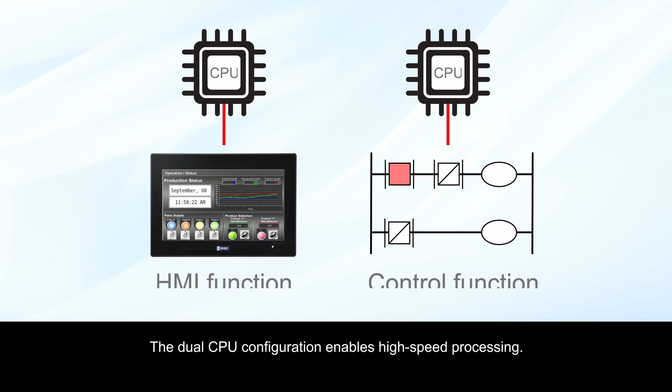The IDEC FT1J and FT2J are touchscreen displays combined with PLCs. The dual CPU configuration enables high-speed processing. FT1J has up to 22 I/O points, and FT2J has up to 30. Both units support analog I/O and pulse output.

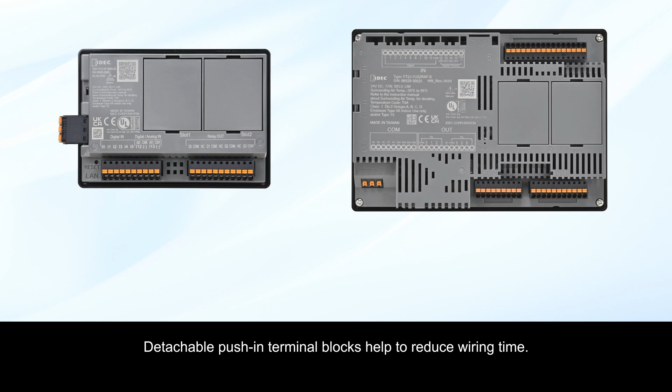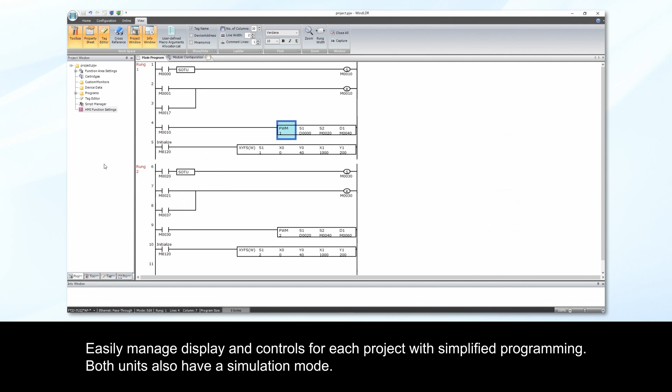Space-saving, compact design downsizes your equipment. The slim bezel design increases display space. Detachable push-in terminal blocks help reduce wiring time. Both units support a high-speed counter, PID control, and PWM control. Easily manage display and controls for each project with simplified programming. Both units also have a simulation mode.

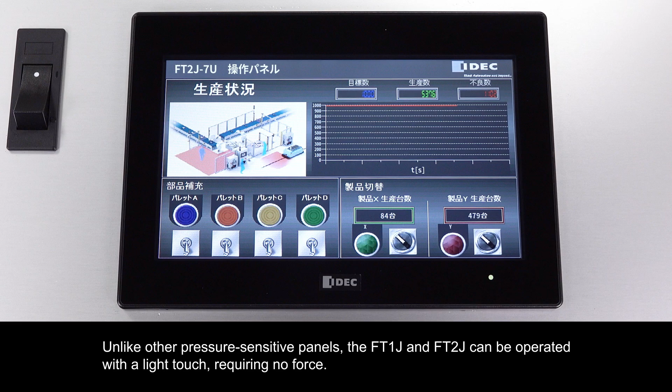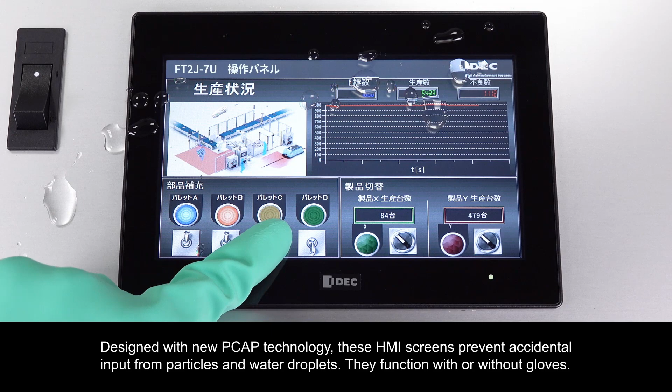The PCAP touch panel's glass top structure maintains high visibility and display clarity. Unlike other pressure-sensitive panels, the FT1J and FT2J can be operated with a light touch, requiring no force. Designed with new PCAP technology, these HMI screens prevent accidental input from particles and water droplets. They function with or without gloves. The glass top structure is made using tempered glass, making it highly durable and water-resistant.

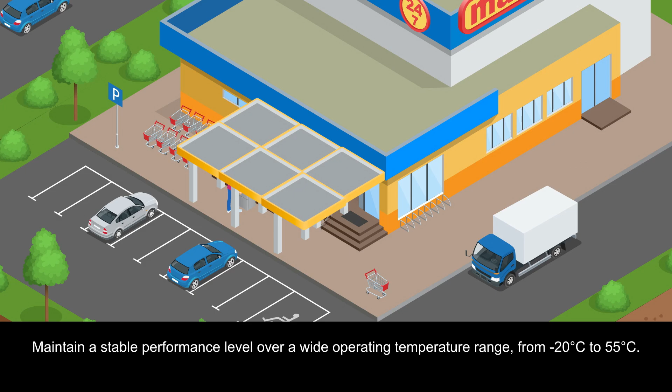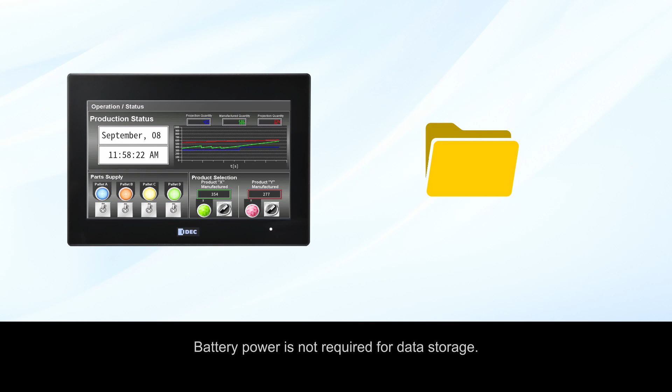Both the FT1J and FT2J are IP66F IP67F rated for cleaning with direct water jets. They maintain stable performance over a wide operating temperature range, from -20 to 55°C. Battery power is not required for data storage. No battery replacement, maintenance, or special procedures for transport by air or ocean are necessary.

Distance is no issue with the FT1J and FT2J. Remote monitoring and operation can be done from anywhere, at any time. Connect with a tablet, smartphone, or PC using the web server. A Wi-Fi USB dongle is used for wireless connectivity. You can play sound files with a connected USB speaker.

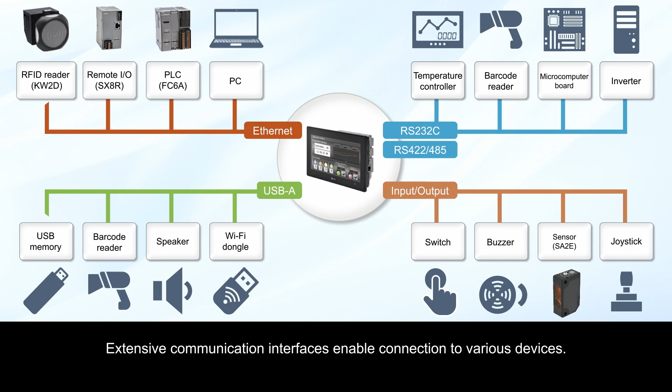Extensive communication interfaces enable connection to various devices. Seamless connectivity solutions enable IoT operation. These units support MQTT, Ethernet IP, and Modbus TCP, acting as a gateway between your manufacturing environment and the cloud.

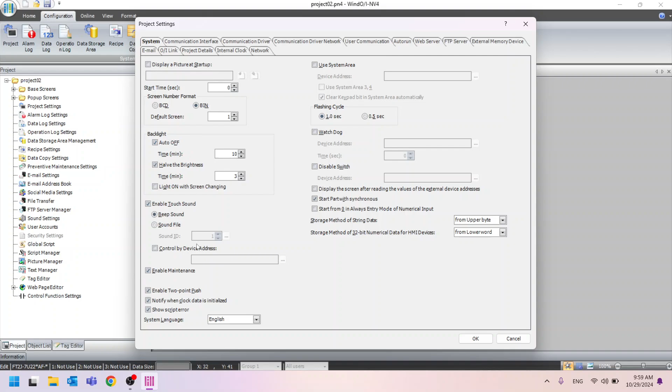Next, we have the Configuration tab. This is where you'll find almost all the settings for the various functions of the FT2J. If you click on the Project tab, a pop-up will appear. In the System tab, you can set basic settings like display a picture, startup, backlight, and beep sound. I'll provide more details about this later.

Next, in the Communication Interface tab, you can configure settings for RS-232, RS-485, and Ethernet, such as what they are used for and what protocols they use. This also includes USB settings.

In the Communication Driver tab, you can simultaneously communicate with up to 3 other PLCs by selecting the brand of PLC you want to communicate with.

The Communication Driver Network tab is for configuring the PLC to communicate with. The User Communication tab is used for writing custom communication protocols. The Web Server tab is for configuring remote control monitoring and custom web pages. The FTP Server tab is used for configuring FTP functions. The Email tab is used for configuring email notifications when the machine encounters issues.

In the Network tab, you can configure the use of BACnet IP and Ethernet IP. Here, BACnet IP setting, Ethernet IP setting, and MQTT setting are available for connecting to AWS and Azure cloud servers.

Next, there are alarm log, data log, operation log, recipe function, and many other functions that you can configure here. Next, in the Online tab, you can download or upload projects from here, and you can also monitor or simulate them.

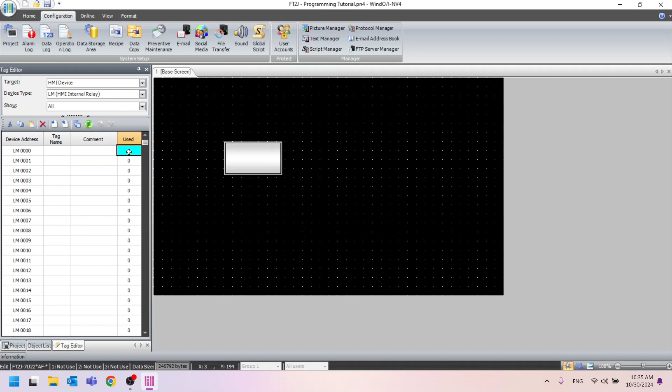The Used section shows how many times a device has been used. If you double-click on Used, it will open a cross-reference for you. This will show you exactly where your device is being used.

Next, in the Information tab, if you make a mistake in your settings or programming, an error message will appear here for you to correct.

And in these tabs, you can click on the top bar and drag them to where you want. If you're right-handed, you can drag them to the right. Personally, I prefer them on the left, and these tabs can be pinned to display all the time.

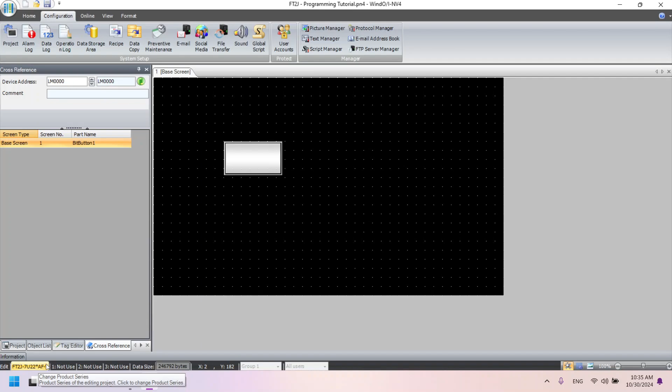At the bottom left, you'll see the model of the device you're currently using. If you click on it, a pop-up will appear. You can use this to convert your current project or older projects designed for a different model.

For example, if you want to convert your project to the FT1J model, select the desired model, choose Zooming Conversion, and click OK. The program will automatically convert your project.

Next, at the bottom right, there's a Snap to Grid option. If you uncheck it, your objects can be placed anywhere without being restricted by the grid lines. But if you check it, your objects will be forced to align with the grid lines.

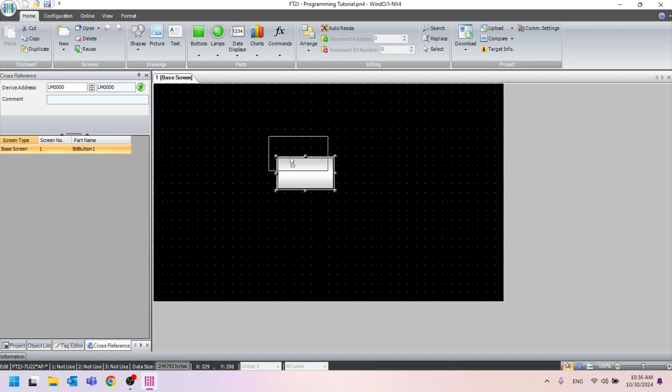And in the grid setting, you can adjust the grid line spacing to your preference. The default is set to 20, and you can also choose the grid color. Note that these settings won't be displayed when you download the program to the actual device. And you can adjust the zoom in and zoom out levels to your preference here.

In the next section, I'd like to guide you on how to use and manage screens.

To create a new screen, right-click on the base screen folder and select New Screen. The number field identifies the page number for reference, and you can name the page in the title field. Once done, click OK to create the new page. You can edit your page by right-clicking it and selecting Properties. I'll name this page Page 1, then click OK. After that, follow the same steps to create page 3 and page 4.

If you want to delete page 4, right-click on it and select Delete Screen. A pop-up window will appear asking you to confirm. Click Yes, and page 4 will be deleted. You can open your screen by double-clicking on it.

Next, right-click on the base screen folder and select Duplicate Screens. A pop-up window will appear where you can choose the screen you want to duplicate and set the screen number and number of copies. For example, I'll set it to 10 and 3, respectively. Then click OK. You will have 3 new pages added: page 10, page 11, and page 12.

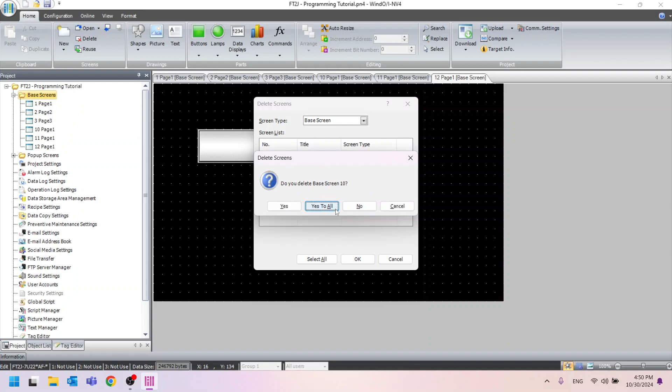Next, if you want to delete multiple pages at once, right-click on the base screen folder and select Delete Screens. You can click on the first page you want to delete, hold down the Shift key, and click on the last page you want to delete. All pages between the first and last selected pages will also be selected. Then click the OK button. A pop-up window will appear, and you should click Yes to All to delete all the selected pages.

Next, right-click and select Reuse Screens. This function allows you to bring screens from other projects into your current project. Find and open the other project file. An open screen pop-up will appear. In this example, I'll copy page 10 and page 11, then click OK. You'll see the screens added to your folder. For this tutorial, delete them afterwards. You can close the screen you're not using by clicking the X in the top right corner.

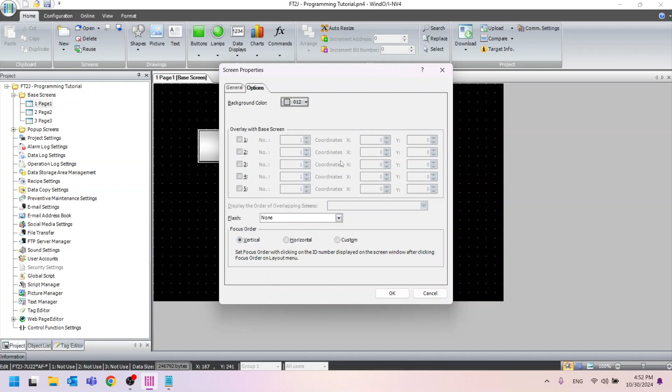Next, I'll guide you on how to set the properties for each screen. You can right-click on the screen and select Properties, or click on the Design area. In the General tab, you can set the number and title. In the Options tab, you can change the background color to your desired color. Then click OK, and the background area of that page will change to the color you've set. For this tutorial, I'll keep the default black color.

And you can create an overlay screen. An overlay screen functions similarly to a template screen, which I'll demonstrate for you next. Please click OK to close this pop-up.

Next, I'll guide you on how to create a pop-up screen. There are already some default pop-up screens available, such as the numerical keypad. You can create one by right-clicking on a folder and selecting New Screen. In the Settings pop-up, you can define the page number and give it a name. I'll call it Pop-up 1. You can also customize the size by adjusting the width and height. For example, I'll set the width to 400 and the height to 200.

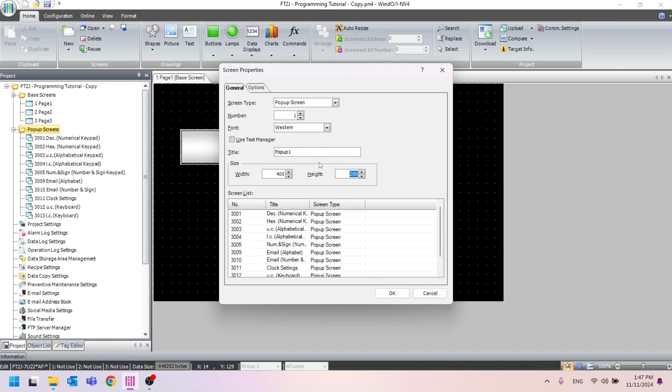In the Options tab, you can also adjust the color and effects, but I won't be making any changes there. After that, click the OK button, and a pop-up screen will appear, which you can design according to your preferences. When you want to use it, you can use the Go to Screen button and select the pop-up to open it.

Next, I'd like to introduce you to a method for creating an overlay template screen. The advantage of this is that you won't have to design and edit your objects on every page. By using this method, you can design and edit objects within a single page, and the changes will be applied to every page where you use this template. This can significantly reduce your design time.

Right-click on the base screen folder, then select New Screen. For this example, set the number to 100 and the title to Template 1. Then click the OK button. On page 100, I'll create an example template for you using various objects so you can see how to make an overlay screen. I'll provide more details about these objects later.

Go to the Home tab and select Picture. Then draw on the Design area. A Picture Manager pop-up will appear. Click Import and select the background image you designed.

Click Open and Yes to all. Next, uncheck the box for your image to keep it stored on your device. If you check it, the image will be stored on an external memory like a flash drive. Then, click the Select button to insert the image into your design.

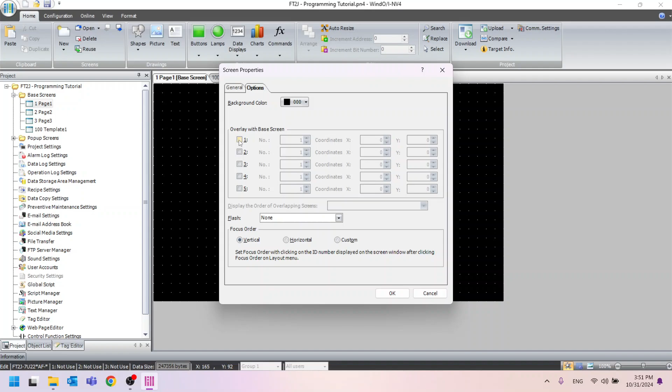Next, go back to Page 1 that we created. Delete the buttons we made earlier. Then, right-click on the page and select Properties. Go to the Options tab. Check the first option and select Overlay Screen at 100. For the coordinates, set both X and Y to 0.

At Display the order of overlapping screens, select Display this screen over Overlay 1. Then, click OK. You will then have the template you designed on page 100 overlaid on top of your page 1. Then, on page 1, you can design anything you want. Next, go to page 2. Delete that button. Then, go to the settings and configure it the same way as page 1. Do the same thing for page 3.

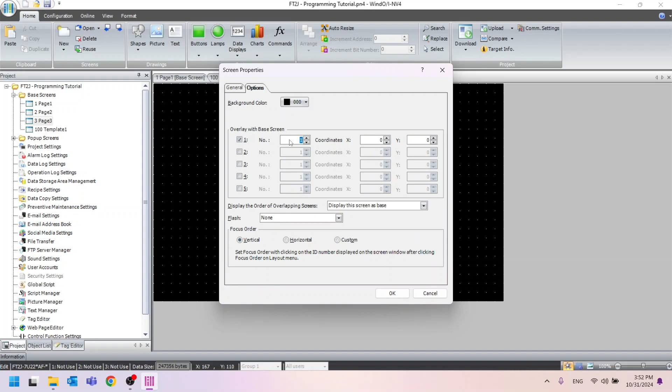If you want to edit your template, go to page 100. For example, if you want to add a picture to your template, go to Picture and select the image you want. Then, adjust the size. You'll notice that if you add a picture to page 100 just once, the same picture will appear on pages 1, 2, and 3. And you can design the other parts of each page as you wish, independently. However, only the objects drawn on page 100 can be shared among all pages.

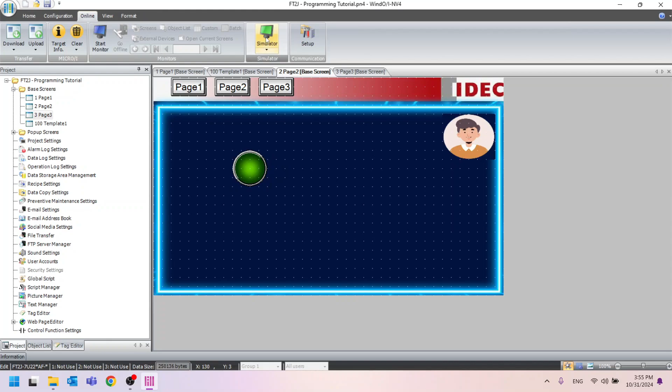This is a common use case for overlay screens, to save you time on design revisions. You can also try out the simulation by going to the Online tab, then selecting Simulator and clicking the OK button to save your project. A simulator pop-up will then appear. You can try clicking the buttons to switch your screen to each page you design.

Then, close the pop-up. In the next part, I'd like to introduce you to the drawing tools.

Let's start with shapes. Shapes provide you with basic geometric forms that you can use as needed. For example, let's take a rectangle, draw it wherever you want on the canvas, and you'll get a rectangular box. Next, you can double-click to open a settings pop-up. This will allow you to adjust the line width, line type, foreground color, background color, pattern, round type, and shadow according to your preferences. Once you've finished setting your preferences, click the OK button. You will also get a rectangle according to what you have set.

Next, I'll introduce you to the Picture tool. Click on Picture and then click on an empty area. A Picture Manager pop-up will appear. First, I'd like to show you how to create a new folder.

Click on the Configure button. A category pop-up will appear. Then, click on the Add New Category button. This will create a new folder. You can also delete it by clicking the Delete button. Click the Add button to create a new folder, and then click the Rename button to change the folder's name. After that, click OK. This will allow you to categorize your images.

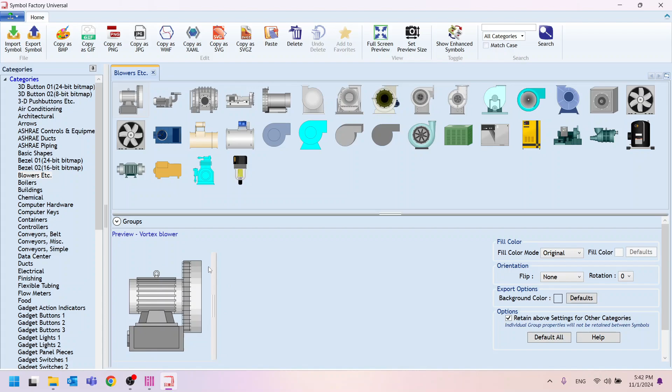If you want to import an image, simply double-click on the image area. You can then name your image in the Picture Name field. There's also a color exchange checkbox, which I'll explain later. After that, click OK, then select the desired image and click Select.

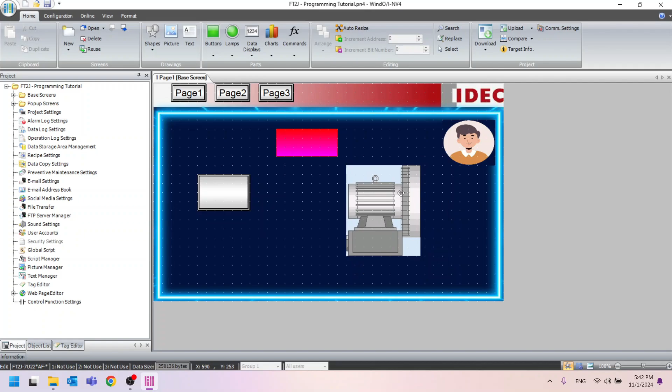You'll notice that the image you added has a blue background, which we don't want. To fix this, double-click on your image, then press the Browse button. A Picture Manager pop-up will appear.

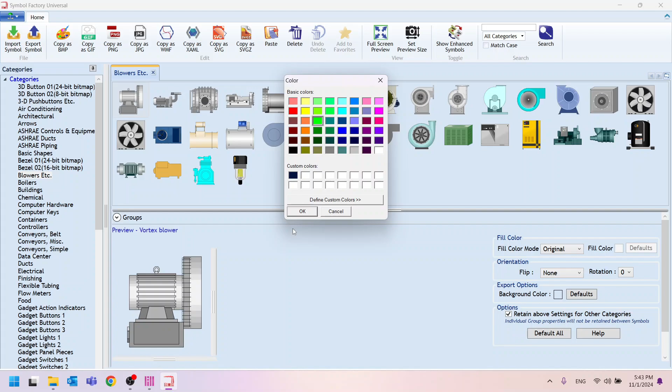Go to the Symbol Factory. In the export options for the selected image, choose a background color. I suggest choosing a color that doesn't appear in your image. For example, let's choose green.

Then click OK, and the background of your image will be changed to green. Next, double-click your image and give it a name. Then check the color exchange box. In the From field, choose green, the same color you selected earlier. Click OK. In the To field, select transparent color and click OK again.

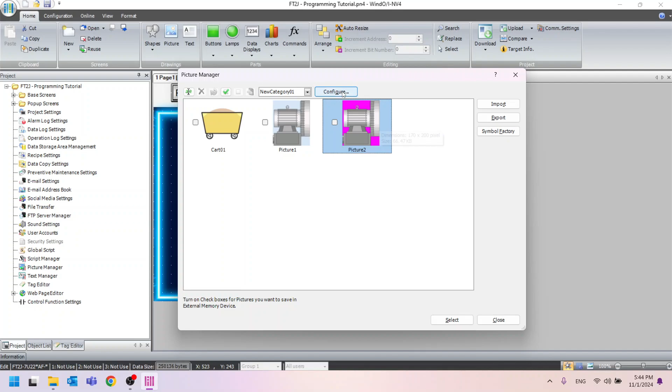Now you'll have your image with the background removed, which will be displayed as pink in the software. Next, click Select and then OK. Now your image will have its background removed and you can resize it as needed. This is a typical workflow when using the Picture command.

Next, for the Text tool, click on Text and then click on the area where you want to place your text. A property pop-up will appear. Try typing the text you want and then click OK. You will now have the text you created.

If you want to edit, double-click on the Font section. You'll find a list of system fonts available. If you use a system font, you can adjust the size here as needed. And you can also adjust the text color.

You can choose any color you want. And you can adjust the background color. Then click the OK button. Next, double-click to open the pop-up.

You can select Windows Font. At the Windows Font option, you can click Change, and then select the desired Windows font. After that, click OK, and the selected Windows font will be applied to your text. This is generally how you use the Text command. In the next part, I'd like to guide you on how to use the Buttons command.

Please click on the Buttons command, then select the Bit Button command, and draw it in your desired area. You'll then have a Bit Button object. Next, double-click to open the Settings pop-up. First, let's look at the General tab.

The first thing I want to introduce is the Action mode. When you click once, it will display various actions such as Set, Reset, Momentary, Alternate, Toggle, and Move. I'll explain how each of these works for you.

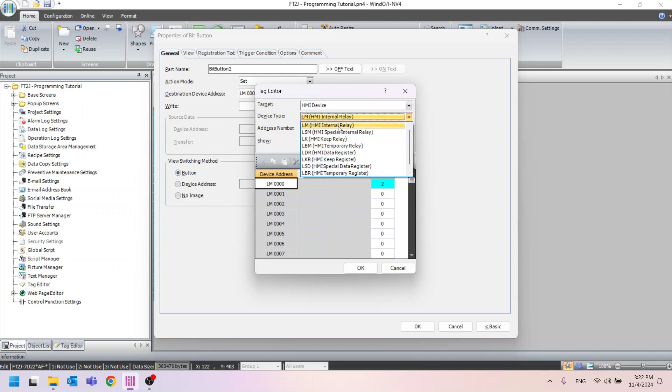A pop-up window will appear. At the target, if you select an HMI device, the HMI device is an internal device located on the touchscreen side. Please click on Device Type. The most commonly used device is HMI Internal Relay, which functions as a bit device, displaying either a 0 or 1 status. Next, LDR HMI Data Register is used for data types that are word.

If you want to use a specific device, you can simply click to select it from the list, or you can directly input its address number. For this tutorial, I will only introduce these 2 device types. I will not introduce the other types to you yet.

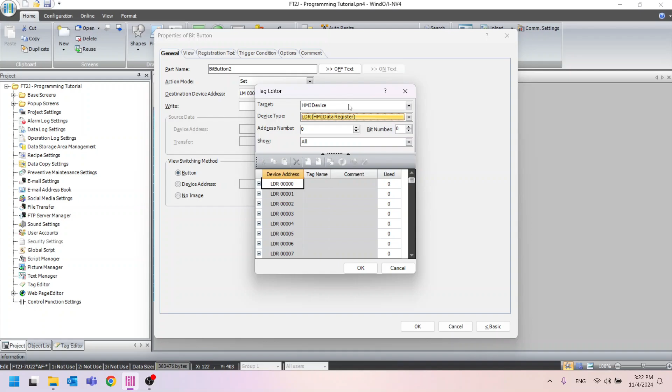Next, go to the target and select Control Device. You can only select FT1J or FT2J models, which are HMIs with built-in PLCs. In the device type, you will find PLC side devices such as Q output, M internal relay, timer, counter, and data register. You can start learning to use these PLC side devices immediately.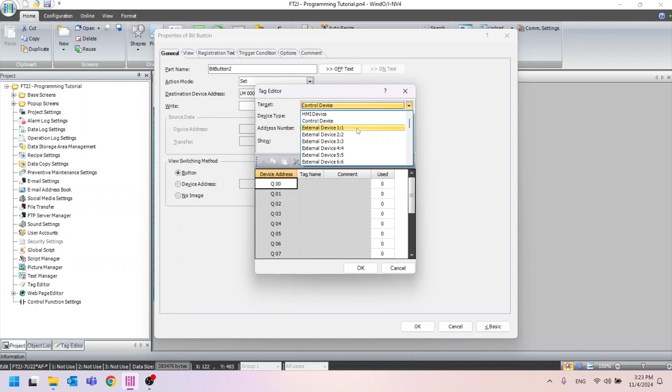Next, for external devices, if we have additional connections set up with other PLCs, you can then call up and use devices from those PLCs as needed. For this tutorial, please select the target as the HMI device, set the data type to LM, and the address to 0, then press the OK button.

In the right section, if your program doesn't display this part, you can click the Basic or Advanced button here. I recommend selecting Advanced to access all settings. You can only configure this section when you select the Set or Reset action.

For example, when you choose Set as the action, LM0 as the destination device, and write a value of 5, pressing the button, LM0 to LM4 will set the value to 1.

Next, for the action mode, if you choose Move, you can also specify the source data and transfer. For example, if you set the source device to LM0, the destination device to MO, and the transfer value to 4, when you press the button, the values from LM0 to LM3 will be moved to MO to M3.

For this tutorial, I'll choose LM5 as the source device and move just one value to the destination device, LM0.

Next, regarding the view switching method, the default setting is usually button. This means that your images, when they are on or off state, will appear as if a button has been pressed. You can select a device address to make your button change its state based on the specified device. This will function like an illuminated push button switch.

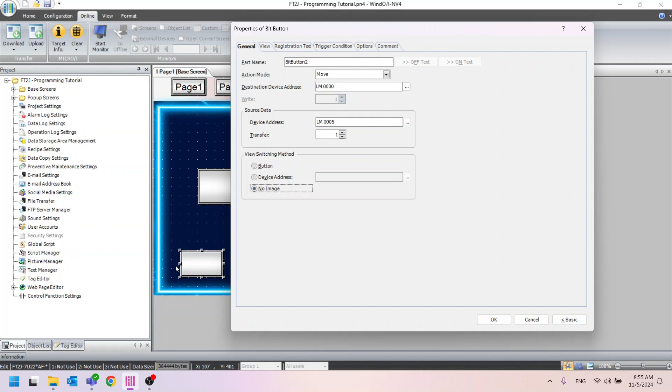For example, if you set it to LM10, when your LM10 is in the on state, your button will display the on state image, and if your LM10 is in the off state, your button will display the off state image. And if you select no image, the image for your button will not be displayed, which is similar to hiding the button. However, the button will still function normally.

Please select the button first. Subsequently, within the View tab, you can select images for your button in different states. You can specify which image you want to display when the button is on and which image you want to display when it is off.

In the Image Type section, if you select Standard and then click the Browse button, a pop-up window will appear. You can select various images as desired, and you can search for other images by changing the type. For now, I'll use the rectangle type.

You can press the off or on button to view your image in each state. I will select this image, and then please press the OK button.

On the right-hand side, you can adjust the color of your button. For the foreground color, I will select blue. And for the on state, I will also adjust it to blue. You can press the on or off button to view a preview of your button.

Next, if you select the image type as picture, please click the Browse button. A Picture Manager pop-up will appear. You will be able to select the imported image that you desire.

Please click on the symbol Factory button. A pop-up will appear. If you wish to use a button or a lamp, I recommend using the Round 01 or Square 01 categories. As an example, I will choose this button.

This will allow you to zoom in on your image. I recommend clicking the default All button once to see the original picture. If you select this image, please double-click on it.

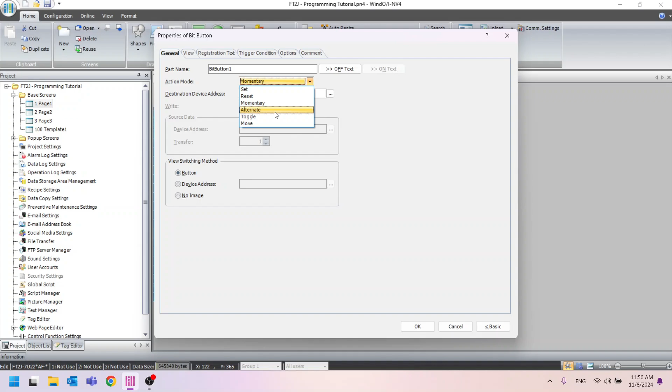Next, I'll make another copy of the button, change the action to Alternate, and the text to Alternate. Then click OK. Next, repeat the same process, but change the action to Toggle.

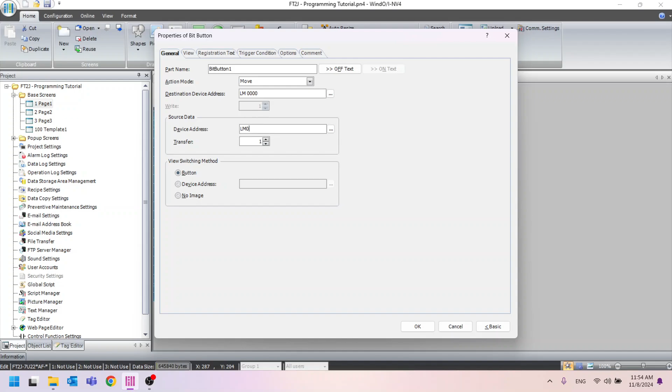Next, I'll make another copy of the button, and change the action mode to Move. I'll set the source device address to LM0, and the destination device address to LM1. Then change the text field to Move. Finally, click OK. Next, I'll create a sample lamp so you can see the status of the device address I've set.

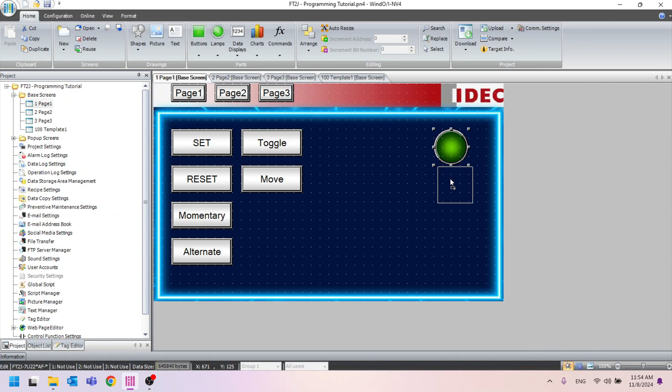I'll explain the lamp section in detail later. In the trigger condition section for lighting, the default device address is already set to LM0. Press the close button. Next, I'll duplicate the lamp and set its device address to LM1. Then click OK. Next, I'll go to the Online tab and select Simulator.

The software will prompt you to save your project first. Please click OK. A simulator pop-up will then appear. Next, try pressing the Set button.

Your device address, LM0, will remain in an on state. If you press the Reset button, LM0 will remain in an off state. For the Momentary button, if you press it, LM0 will turn on, but if you release it, LM0 will turn off.

The Alternate button acts like a toggle switch that stays in its current state until you press it again. So if you press the Alternate button, it will be as if the button is constantly pressed, and LM0 will remain on. Pressing it again will turn LM0 off.

The Toggle button, on the other hand, simply switches LM0 between on and off each time you press it, without any visual indication that the button is being held down.

If I press the Move button, the value from LM0 will be moved to LM1. If I press the Set button, LM0 will be turned on. Then if I press the Move button, the status of LM0 will be copied to LM1, causing the lamp to also be on. In general, the Bit button is commonly used in this way.

After that, please close the simulator. Next,

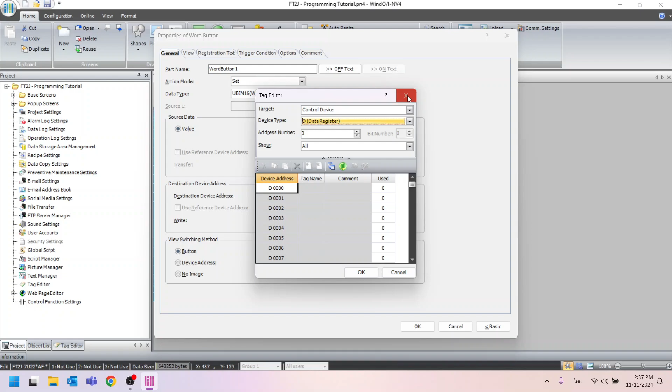For this time, I'll use LDR0. For example, I'll set the source device to 100, which means when I press this button, the value 100 will be set to my LDR0.

Next, set the action mode to Move. This will allow you to specify a source data. I'll copy this device address and change it to LDR10. This means when I press the button, the value in LDR10 will be moved to LDR0. The Move action is commonly used in this way.

Next, set the action mode to Momentary. The momentary action has two values.

Let's say set the on data to 100 and the off data to 0. This means when I press the button, the value in LDR0 will be set to 100, and when I release the button, it will return to 0.

Next, set the action mode to alternate. If I set the on data to 100, pressing the button once will change the value in LDR0 to 100. Pressing it again will change it back to 0, alternating between the on and off data values.

Frequently used actions include add, subtract, multiply, and divide. Let's say you choose the add action. You can define a source one. For example, I'll copy and change it to LDR10, and for the value, I'll set it to 100. If I press the button, the value from LDR10 will be added to 100, and the result will be stored in LDR0.

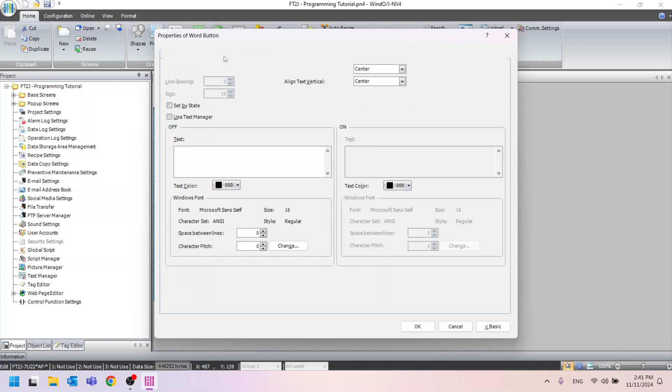Once you've finished setting everything, click the OK button. Next, go to the Go to Screen button. Click it, and then draw on the area you want. Double-click to open a settings pop-up.

There will be various actions available for you to choose from in the action mode. Choose Switch to Base Screen. This will allow you to set which screen to switch to when the button is pressed. For example, if you want to switch to screen 2, when you press this button, set the screen number to 2. When you press the HMI button, it will switch to screen 2.

And what I frequently use is the Open Pop-up Screen function. When you press a button, a pop-up screen will appear. For example, if you set it to screen number 1, pressing the button will display pop-up screen 1 on your HMI. You can also set the X and Y coordinates to specify the exact location where you want the pop-up screen to appear.

Another function I frequently use is Back to Previous Screen. This means that when you press this button, the HMI will go back to the previous screen you were on. For example, if you're on page 1 and you switch to page 10, pressing this button will take you back to page 1. The settings in the other tabs will be similar to the previous button I explained.

Once you've finished setting everything up, click the OK button. Next, I'd like to introduce you to the Multi button. Click and draw on the area you want. Then double-click to open the settings pop-up. The Multi button works similarly to the buttons we've discussed earlier, but with the added ability to create multiple functions.

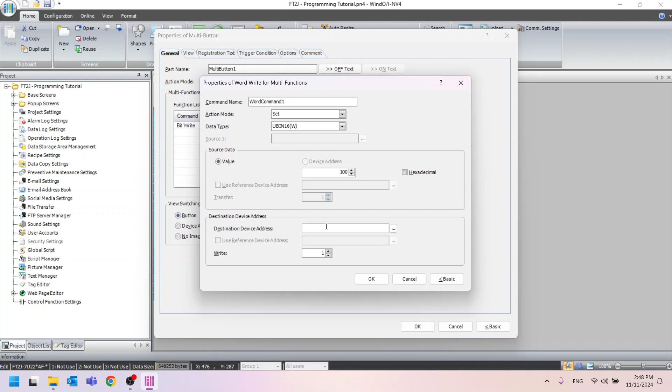Then click Add. Let's say I choose action mode as set and value as 100 and destination device as LDR0. Then, click OK, add another Go to Screen action, then click Add and select screen number as 2. Finally, press OK. If you press this button once, all three commands will be executed in sequence.

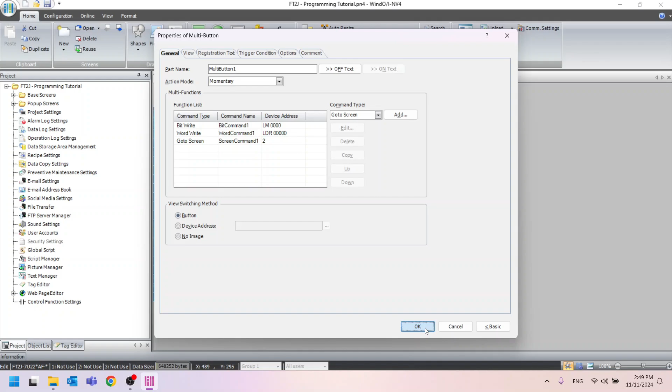You can customize the settings in the other tabs to your liking, just like the buttons we've discussed earlier. Once you're finished, click the OK button. In the next section, I will provide examples of how to use the buttons that I have previously explained.

Before we begin, I will delete the buttons that I have already created. The first button I would like to introduce is the Go to Screen button. I have already created these buttons, labeled Page 1, Page 2, and Page 3, at this location. I've already created this button on page 100. If you navigate to that page, you can modify the button settings by double-clicking on it.

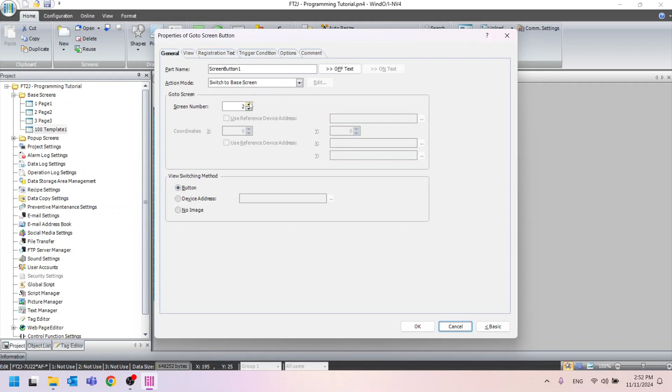In action mode, I will select Switch to Base Screen, and choose 1 for the screen number. Then, I will press the OK button. For the Page 2 button, the settings will be similar. However, you'll select 2 for the screen number and then press OK. The Go to Screen button will be used in a manner similar to this example.

Next, we'll return to page 1, and I'll demonstrate an example of a Word button for you.

I will draw the button as desired, then double-click on it to open the settings. In this action mode example, choose Add. For source 1, I'll use LDR0. For source 2, I'll set the value to 10.

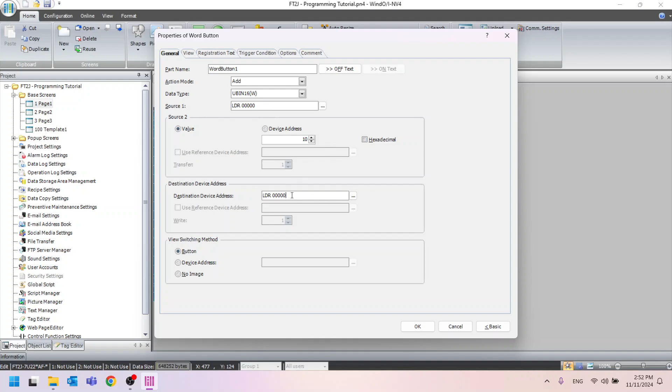For the destination device address, I'll specify LDR0 as well. This means I'll take the value in LDR0, add 10 to it, and then store the result back in LDR0. For the View tab, I'll use the default settings for now. On the Text tab, I'll name this button Add. For the Trigger Condition tab, I won't make any additional changes. Then I'll press OK, and so I will now have an Add button.

Next, I'll go to the Data Display section and select Numerical Display. I'll demonstrate how to use it first, then provide a more detailed explanation later. I will draw here, then double-click to open the settings pop-up. In the display device address, I will set it to LDR0, then press OK.

Next, I will demonstrate a simulation. I'll go to the Online menu, select the simulator. The software will force you to save, then press OK. Once the simulator window appears, clicking the Add button will increment the value of LDR0 by 10. Each subsequent click will increment the value by another 10. This is an example of using a Word button to manipulate a Word-type device address.

After you've finished experimenting, please click the Close button. This is a basic example of how to use a button. In the next part, I'd like to introduce you to how to use a lamp.

Please click on Lamp, then select Pilot Lamp. Then draw in the area you want. For the pilot lamp, it will function the same way we used it before. It will be used to indicate the status of our device address, whether it's on or off. Please double-click to open the settings window.

In the General tab, go to Action Mode. By default, it's set to No Flash, which means when your lamp is turned on, it won't blink. If you want your lamp to blink while it's on, select Flash, then set the flash trigger device address. This means that when your trigger device is turned on, your lamp will blink. But for this example, I'll choose No Flash first.

Next, on the View tab, the settings will be similar to the button you've tried before. If you choose Standard, you can click Browse and select the image you want. But for now, I'll use the default. Then click the Close button. You can press the On or Off button to see the status. And you can set the foreground and background colors for both the off state and on state here. But for this example, use the default value first.

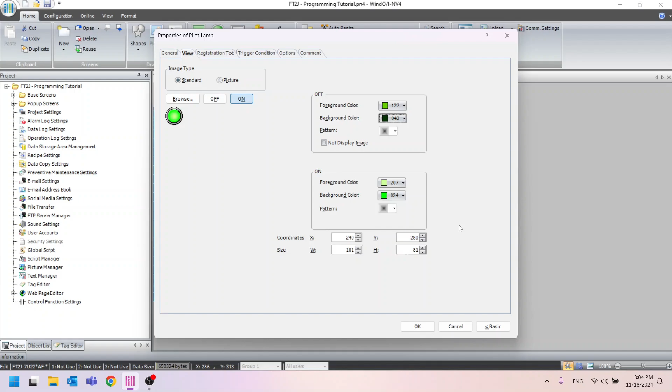Next, on the Text tab, you can choose the font you want, such as Windows or Western. I'll choose Western, and you can set the size here and define your text here. Or if you're using a Windows font, you can click the Change button to customize your font as desired. But for this example, I'll use the Western font and leave all the settings as default.

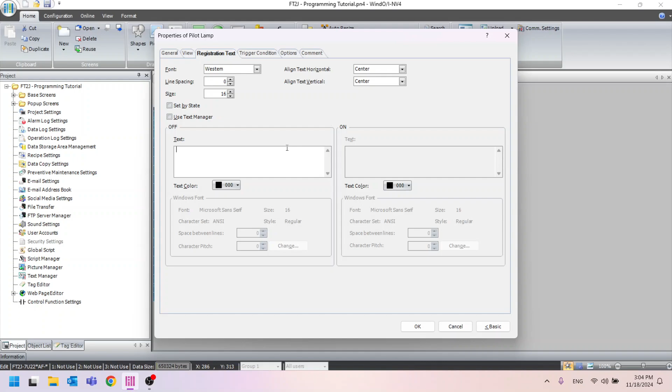Next, on the Trigger Condition tab, in the Lighting section, you can define the conditions that will cause your lamp to turn on or off. In the Trigger Type section, you can set conditions like while on or while off. Typically, we use while on. In the Device Address, you can specify the device address whose status you want to display, or click the three-dot button here and select the desired device address. For now, I'm going to select LM0. In the Visible condition, it's set to Always Visible by default.

If you want to hide your button based on certain conditions, you can set it up in this section. For now, I won't be configuring this part. Next, on the Option tab, you can check the box for Place on the top layer, so that your lamp will be displayed on the top layer. Finally, in the Comment tab, you can add a comment if you'd like. Once you've finished setting everything up, click the OK button.

Next, please try the simulator. Go to the Online menu and select Simulator. Then click the OK button to save your project. The simulator window will appear. This means your lamp is assigned the device address LM0.

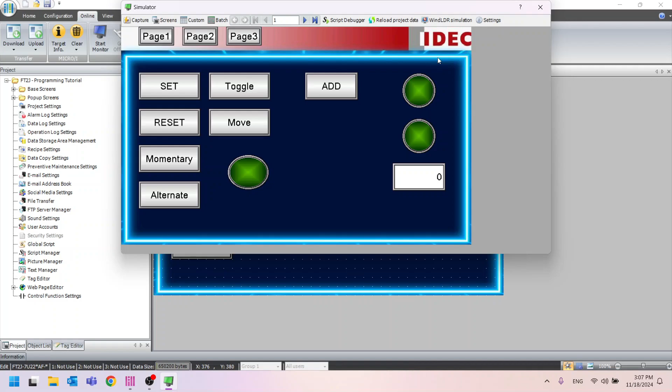So when you press the SET button, your lamp will display an on status. And when you press the Reset button, your lamp will display an off status. This is the same behavior as the button we created earlier. Then please close the simulator. Next, double-click to open the settings window. Then select Flash and set the flash trigger device address to LM0. Finally, click OK. Then try the simulator again.

Press the SET button. You'll notice your lamp will blink even though the device address LM0 is always on. This is a common way to use a lamp. Once you're finished testing, close the simulator.

In the next part, I'd like to show you how to use a multi-state lamp. Go to the lamp and then select multi-state lamp. Then, draw in the area you want. A multi-state lamp works similarly to a pilot lamp, but you can have multiple states.

The device address used to control it will be a word-type device. Please double-click to open the settings window. The switching method is normally set to value, but you can choose either bit number or value as you prefer.

If you choose bit number, your lamp will change its state according to the bit you turn on. For example, if you turn on bit 0 of your device address, the multi-state lamp will display the image for state 0. If you turn on bit 1, it will display the image for state 1. If you turn on bit 2, it will display the image for state 2. And if you turn on any other bits that are not configured, it will display the image for state off.

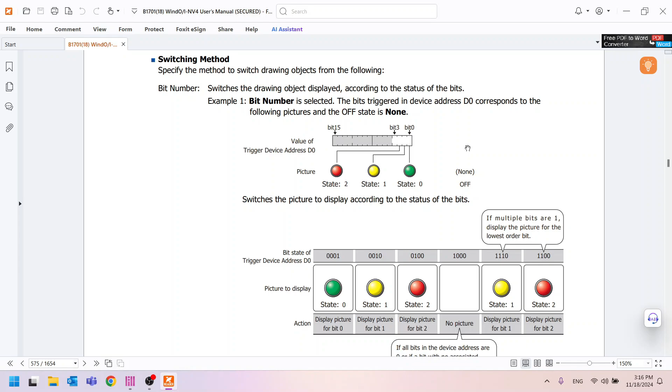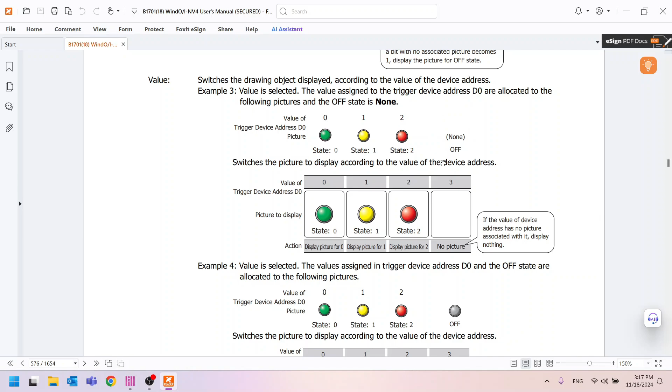Next, if you set it to value, the state of your image will change according to the value of your device address. For example, if you set your device address to D0, and the value of D0 is 0, your lamp will display state 0. If the value of D0 is 1, your lamp will display state 1. If the value of D0 is 2, your lamp will display state 2. If the value in D0 is not within the configured range, it will display state off. This is roughly how it works.

Next, go back to the software. In this example, I will use the value method. For the trigger device address, please click the 3-dot button and select device address as LDR1. Then, click OK. Next, go to the View tab.

Under Image Type, you can choose between Standard and Picture. However, for this example, I'll select Standard first. Next, go to the Text tab. You can adjust the font of your text here. Next, go to the State tab.

Here, you can set the number of states. By default, it's set to 4 states, which are state off, 0, 1, 2, and 3. There will be corresponding images displayed below. If you want to add more states, you can press the up arrow button. For example, if you want 6 states, states 4 and 5 will be added. You can also decrease the number of states by pressing the down arrow button. However, in this example, I will use four states.

In the settings, if you select state off, you can input your text here and customize the color as you wish. You can see a preview image here. You can also set the pattern and text color. For state 0, the lamp will be set to green by default. You can customize the color if you'd like. Other states will follow the same pattern. However, for this example, use the default settings.

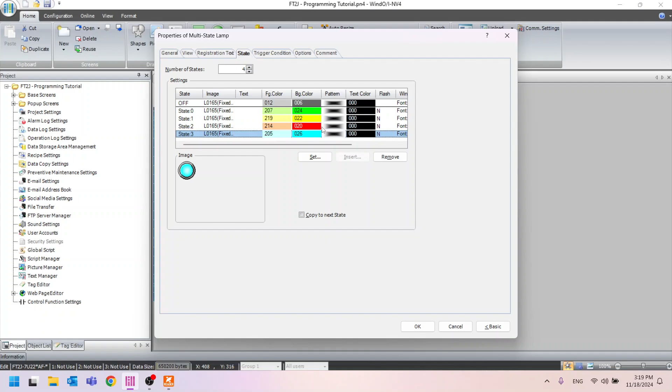Next, we'll go to the Trigger Condition tab. Here, you can set the visible condition. For now, use the default setting. You don't need to make any changes in the Option or Comment tabs. Once you're finished setting up, simply click the OK button.

Next, go to Data Display, then select Numerical Input and draw it in your desired area. I'll explain this object in detail later. Next, double-click to open the settings window. In the Destination Device Address field, select LDR1 and then click OK. Once you've finished setting everything up.

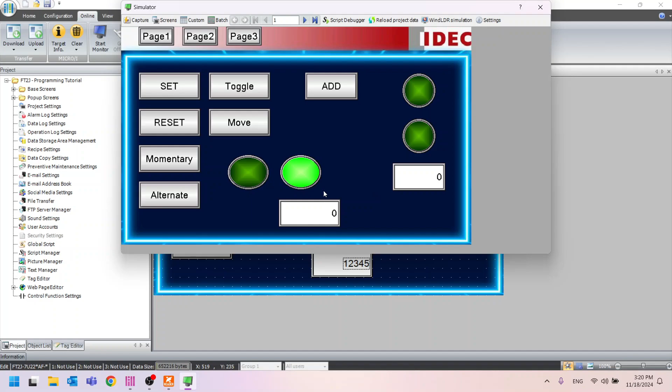Let's test your program using the simulator. Go to the online menu and choose Simulator. Then, click OK to save your project. Right now, my LDR1 is set to 0, so my lamp will display the image for state 0.

If I change the value of LDR1 to 1, the image will switch to state 1. Similarly, if I set LDR1 to 2, the image will change to state 2, and so on for state 3. If the value is 4, the image will display as state off, because you haven't defined a specific setting for it. This also applies to any other values that you haven't configured in your multi-state lamp. So, that's how you use a multi-state lamp. Once you've finished testing, you can close the simulator window.

Next, I'd like to introduce you to the numerical display. Please navigate to Data Displays, select Numerical Display, and draw it in your desired location. After that, double-click to open the settings window. The numerical display will be used to show the value of your device address, allowing you to see its current value.

In the General tab, you'll find a section called Display Type. Here, you can choose between decimal (base 10) and hexadecimal (base 16). Typically, we use decimal. Next, let's move on to the data format.

Under Data Type, you'll find various data types to choose from, and in the Digit section, you can specify the number of digits to display. If you refer to the manual, and select decimal for the display type, you'll have the option to choose W or I for the word type, allowing up to 5 digits. If you select D or L for the double word type, you'll be able to display up to 10 digits. You can also set it to BCD or float.

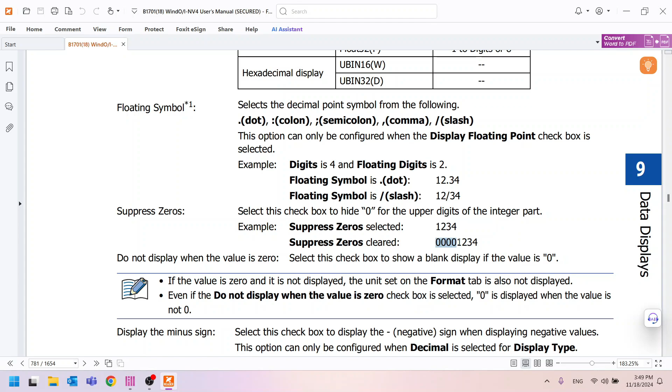Next, for the Do Not Display When Value is 0 option, if you check it, it means that when the value in your device address is 0, nothing will be displayed. However, I generally recommend that you leave this option unchecked.

Next, for the Display the minus sign and Display the plus sign options, if your data type can display negative values, like the I type, you can choose whether or not to show a minus sign or a plus sign before your numbers. For the symbol to show when out of range or error occurs option, you can customize the symbol that will be displayed when the value is out of the acceptable range or when an error happens.

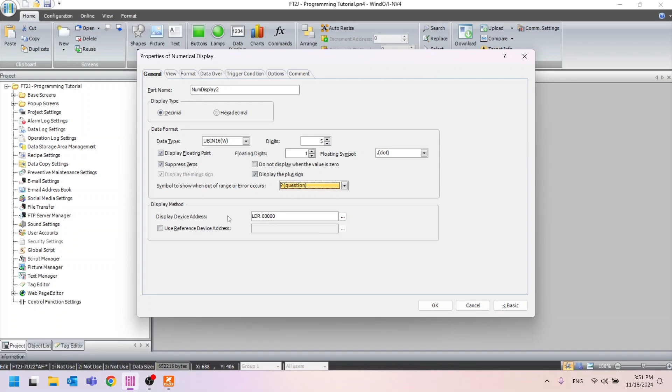In the Display Method section, the Display Device Address option allows you to specify which device address you want to show. You can tap the 3-dot button, then select the desired address. In this case, I'll choose LDR0. After that, please tap the OK button.

Moving on to the View tab, in the Image Type section, you can choose between Standard, Picture, and None. If you select Standard and click Browse, you'll be presented with a list of standard images to choose from. If you select the Picture option and click Browse, you can either choose an image you've imported or select one from the symbol factory. If you select None, no background will be displayed.

For now, please select Standard. Then, in the Plate Color section, you can customize the color as you wish, including the foreground color, background color, and pattern.

Next, let's move on to the Format tab. In the Font section, you can customize the font to your liking. For this example, I'll choose Western, and then you can adjust the size, text alignment, and text color as needed.

Next, let's go to the Data Over tab. If you want to limit the value in your device address, you can select Value and check the minimum and maximum boxes. This will allow you to set a range. For example, I'll set it to 0 and 100.

Your value will only be displayed within this range. If it falls outside this range, it will display an error based on the symbol you've previously set. Alternatively, if you choose Device Address, you can set the value based on the specific device address you've selected.

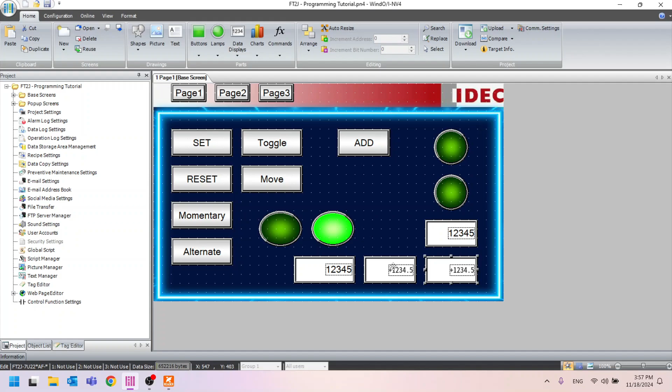Both objects will have the same device address, and the floating digits will be set to 1. However, I'll modify this object by unchecking the Display Floating Point option, and then I'll click OK.

Next, navigate to the Online menu and select Simulator. Then, click OK. When I press the Add button, the value in LDR0 will be set to 10.

However, this object will display 10, while this other object will display 1.0. If you press the button again, the value in LDR0 will be incremented to 20, which will be displayed as 20 and 2.0 on the respective objects. Once you have finished testing, please close the simulator.

Next, I'd like to demonstrate how to use numerical input. Please navigate to Data Display, select Numerical Input, and draw in the desired area. Your numerical input will then be generated. Next, please double-click to open the Settings window.

Alternatively, you can use it to enter and display decimal numbers, and you can even configure it to display asterisks instead. Returning to the software, in the upper section, you can simply use the default settings. For this particular part, I won't go into great detail about these settings.

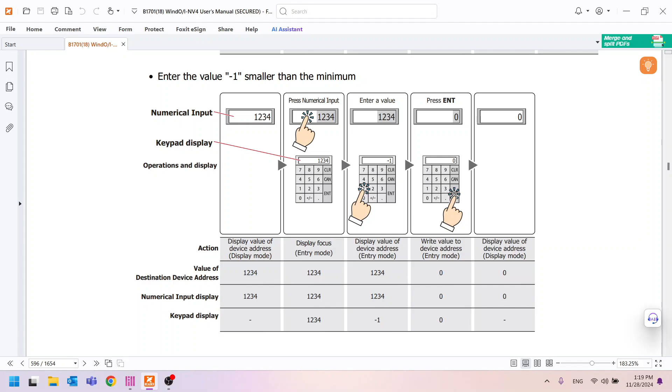This feature is designed to prevent errors from occurring when inputting data into the specified device address. In this example, we'll check the box.

Next, in the Input Method section, you can specify the destination device address. For this example, I will select LDR0, which we have used previously, and the Focus Is Moved By Enter Button checkbox. If you use this function and have multiple numerical inputs on the same page, normally after entering a value into one, you would need to click on the next numerical input to enter another value.

However, if you enable this function, once you enter a value in numerical input A and press Enter, the cursor will automatically move to numerical input B, allowing for a seamless and efficient input process. I won't be using this feature at this time. Moving on to the View tab, you'll find options similar to the numerical display.

For the image type, you can choose between standard, picture, or none. In this instance, I'll select standard. I'll also change the plate color to make it different from the previous one. Feel free to choose any color you prefer.

Moving on to the Format tab, you'll find options similar to the Numerical Display tab. Here, you can choose your preferred font. If you select Windows, you can click the Change button to select a specific font from the list. However, use Western for now, and set this as the default option.

There's an option to display numerical values with an asterisk. If you check this option, the value of your object will be displayed with an asterisk. You can customize this setting in this section, however, I won't be using this feature at the moment. In the With Unit section, you can append a unit of measurement to the end of the value, such as cm for centimeters. However, I won't be using this feature at this time.

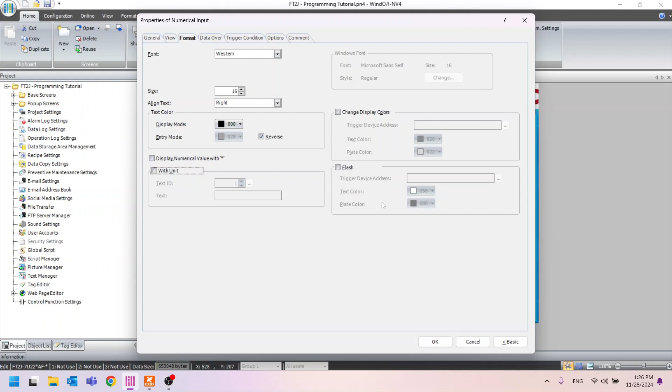In the Change Display Color section, when you activate the trigger device, both the text color and plate color will change to the colors you've specified. In the Flash section, when you activate this trigger device, the text color and plate color will alternate between the default color you've set and the color you've specified for the flash effect. However, I won't be using this feature right now.

Next, let's look at the Data Over tab section. I usually recommend setting limits in this section to prevent data entry errors. You can define minimum and maximum values as needed. For this example, I'll set the range from 0 to 100.

In the When Data Over section, you can check the report box and specify a report device address. When the value in your device address falls outside the range you've set, this device will be activated.

Next, let's move on to the Trigger Condition tab and the Input Condition section. By default, the trigger type is set to Always Enabled, meaning you can input data at any time. If you want to set specific conditions for inputting values into the device address, you can do so in this section. In the Visible Condition section, it's usually set to Always Visible by default. However, you can customize the visibility conditions in the section. For now, I won't be making any changes to the settings.

Moving on to the Options tab, you can adjust settings like the No Touch sound. Also, the Input and Display with Arithmetic section is a bit more advanced. Any value you input into your device address will first undergo calculations based on the equation in this section before being sent to the device. On the display, the value from your device address will be calculated based on the equation you've created before being displayed in the numerical input. However, I won't be guiding you through the usage of this feature.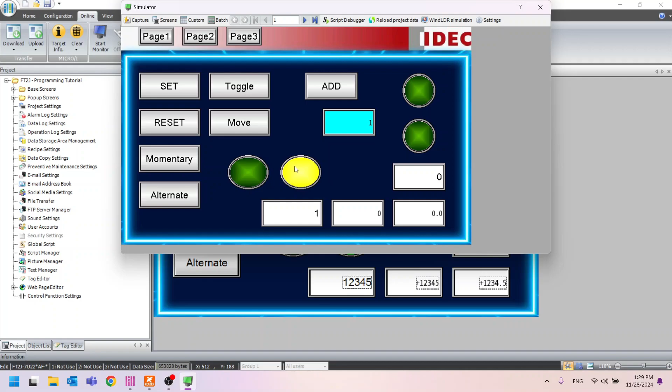Next, go to Online and select Simulator. Then, click the OK button. Try inputting the value 1 and then press Enter. The multi-state lamp you created earlier will change its state, because we're using the same device address.

When you change the value to 2, it will turn red. Generally, the numerical input will be used in this manner. Once you've finished testing, please close the simulator window.

Moving on, since this page is full, I'll navigate to the base screen and open page 2. The next function I'd like to introduce is the Message Switching Display. Please navigate to Data Displays and select Message Switching Display. Then, draw it in your desired location.

The Message Switching Display works like this. Imagine you've defined Message 0 as drying, Message 1 as heating, and Message 2 as cooling. Whenever the value associated with the device address that you're referencing changes, the displayed message will automatically update to reflect the new value. For example, if the value of D0 is 0, the message displayed will be drying. If D0 is 1, the message will change to heating. And if D0 is 2, the message will be cooling. This is essentially how the message switching display works.

Returning to the software, please double-click to open the settings window. On the General tab, under Message to Display, there are various settings available. For now, let's select Specify by Message Number. For the device address, please click the three-dot button and choose LDR5. Then, click OK. Next, let's move on to the Message tab.

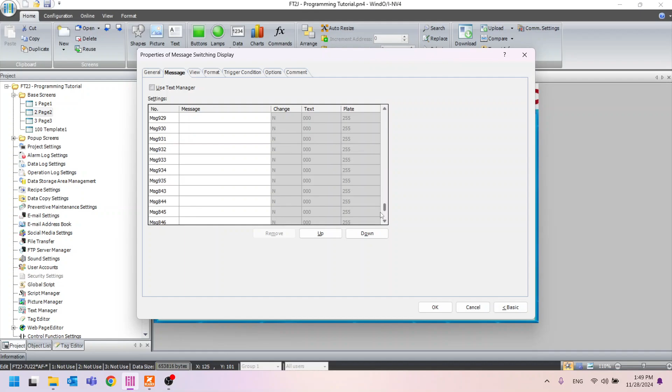Additionally, the message switching display can accommodate up to 1,000 messages. Next, let's move on to the View tab.

The settings here are similar to the other functions we've already discussed. You can customize your image and adjust colors. For this example, I'll use the default settings.

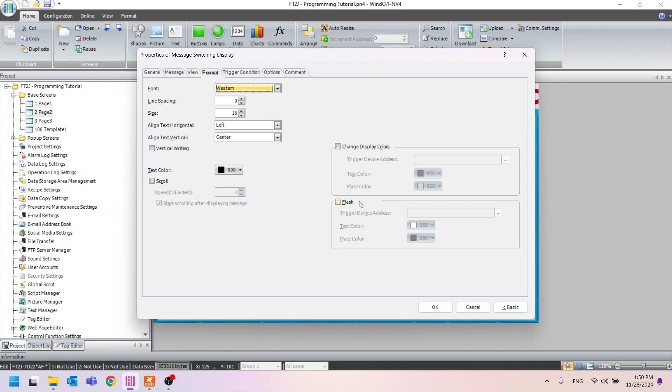Next, let's move on to the Format tab. Here, you can customize the font to your liking, the display colors, and even adjust the flash settings. However, I won't be using these features for this demonstration.

Next, we'll move on to the Trigger Condition tab. Here, you can set the visible condition. By default, it's set to Always Visible, but I won't be making any changes to the setting in this example.

As for the Option and Comment tabs, there's nothing critical to note there. Once you've finished making all your adjustments, simply click the OK button.

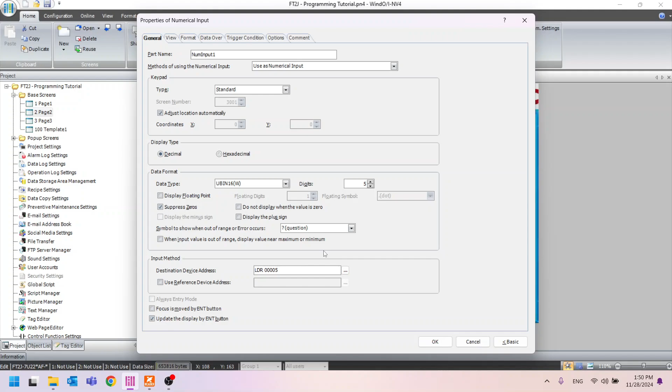Before running the simulator, go to Data Displays and select Numerical Input. Draw in the desired area, then double-click to open the settings window. For the destination device address, I'll set it to LDR5, which is the same as the previous message switching display. Then, click OK. Next, go to the Online menu, select Simulator, and then click OK.

Once the simulator window appears, go to page 2. The message will initially display as TEXT0.

However, if you've set your LDR5 value to 1, the message will then display according to the content you've defined for message number 1. If you change the value to 2, the message number 2 that you've set up will be displayed. Then, you can test the system as you wish.

So, this is how the message switching display will function. Once you've finished testing, please close the simulator.

Next, I'd like to introduce the Character Input function. Go to Data Display, then select Character Input. Draw in the area you want, and you'll have your own character input object.

Next, double-click to open the settings window. Character input is typically used to enter character values into the desired device address. For now, please use the default settings in the General tab at the top.

Moving on to Data Format, under Input Digits, you can specify the number of characters you can input and the number of characters to display. In this example, I'll set both sections to 20 characters for now.

Next, under Destination Device Address, you can specify the device address you want as your character. Be careful not to overlap your devices, because one word can hold 2 characters. I'll be using LDR10. Now, this object will reserve device addresses LDR10 to LDR19 for you.

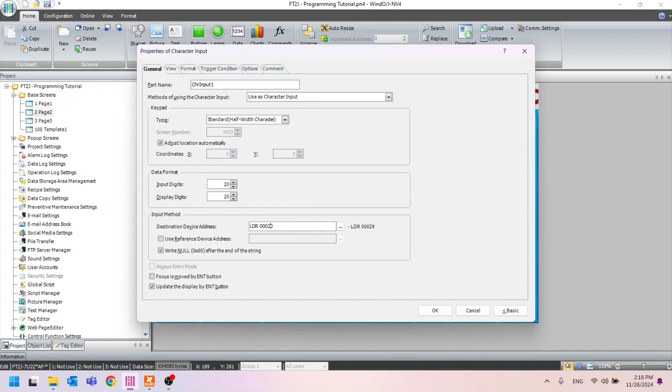Next, go to the View tab. Under Plate Color, change the color to something different from before. Then, click OK. Next, try the simulator.

Go to the Online menu and select Simulator. Then, click OK.

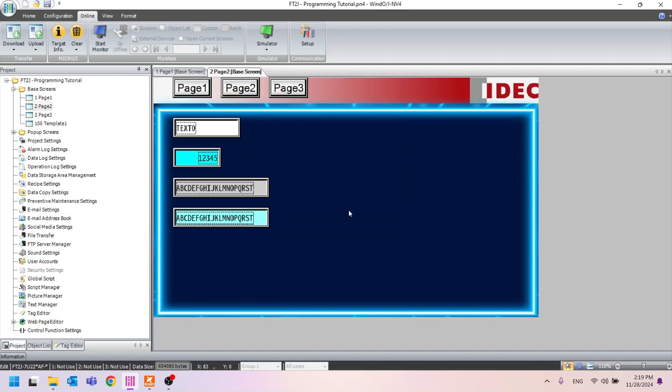Go to page 2, then try inputting any value you want. You can input up to 20 characters as previously set. Press Enter, then try inputting a value in the other field. You can choose between lowercase or number and sign. Press Enter, and the string you input will be stored at the device address you specified.

Next, you'll monitor the device. There are two monitoring modes, Batch and Custom. I recommend using Custom Monitor. Go to the device address and set it to LDR10. Choose the data type as string and set the word to 10.

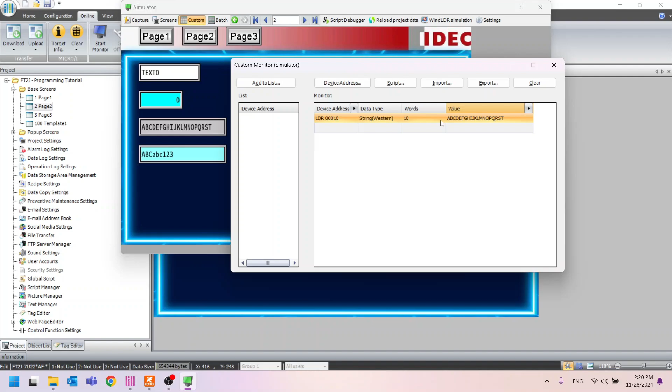Since one word is equivalent to 2 characters, you'll see the data you input in LDR10, and the other one will be LDR20. Please set it up the same way. You'll see the string value stored in the device address you specified. When you're done with the experiment, please close it.

This is typically how character input is used. Then, exit the simulator. Next, I'd like to show you how to use Message Display. Go to Data Display, then select Message Display.

Draw in the area where you want to display the message. Next, double-click to open the settings window. Message Display is used to show strings or characters from your device address, as well as any text you want. You can set the device address for each channel.

Here, for example, double-click and select LDR10, then click OK. Next, specify the number of words you want to display your string. In this example, it would be 10 words. For the next channel, set it to LDR20, and set the number of words to 10.

To display your string, use the backslash symbol followed by the @ sign. It will display channel 1 that you've set up. Then press Enter and type a backslash followed by an @ sign. It will display channel 2 that you've set up. You can use more than one channel, and use the backslash followed by the @ sign to display the value for each channel in order.

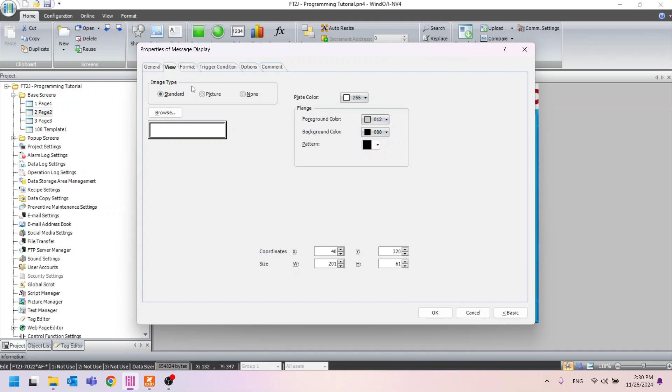Next, in the View tab, the settings will be similar to the other functions I've mentioned before. You can customize it to your liking. In the Format tab, you can do things like scrolling text, changing the display color, or making it flash. However, I won't be using these options in this example. In the Trigger Condition tab, I won't be setting anything. And in the Option tab and Comment tab, I won't be setting anything either.

Then go back to the General tab to double-check everything. Once you're satisfied, click the OK button. You will then see the message display as you have set it up. Next, adjust the size to fit. Next, I'll copy another one by holding down the Control key on the keyboard and dragging it, then dropping it.

Next, double-click to open the settings window. For this example, I'll show you how to do scroll text. I'll move the backslash at up one line. Then go to the Format tab and check the scroll checkbox. Finally, click OK. Then please adjust the size of your message display to an appropriate size.

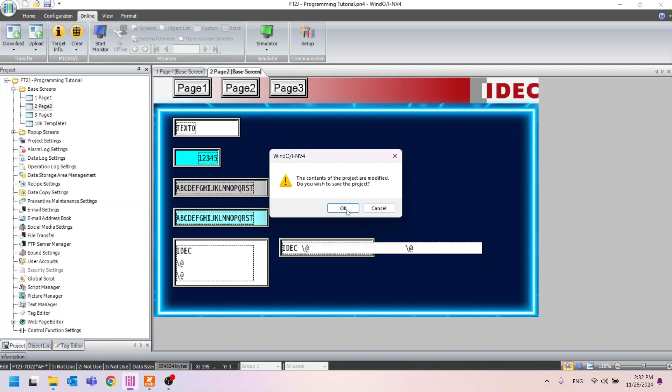After that, please go to the Online menu, select Simulator, and then press the OK button. Please go to page 2, then try to input your text in the character input that you created earlier, and press Enter. You will see your message on the message display.

Then try inputting another message and press Enter. Another set of messages will be displayed on your message display, while the other message display will show the messages in a scrolling format. For the message display, you can directly define the text, or you can display the text from the device address that we have specified. This is generally how the message display is used.

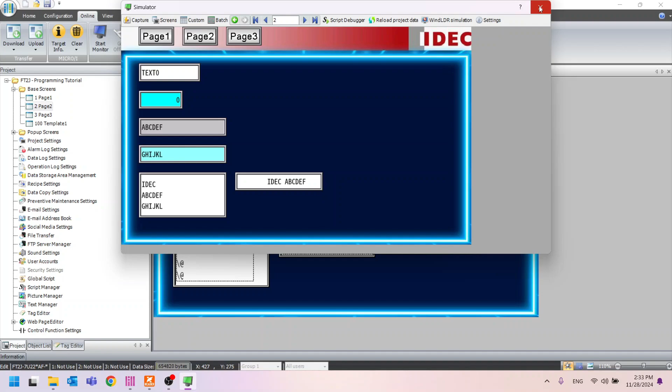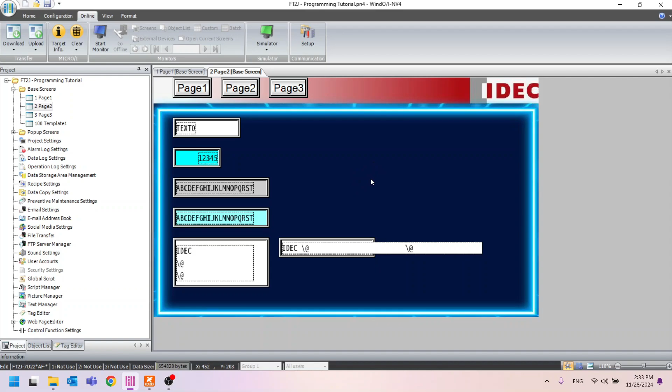If you have finished testing, please close the simulator. For the use of FT1J, FT2J PLC plus HMI, especially in designing HMI screens on IDEC software, I will only give you this much introduction for now. There are many other commands that I haven't introduced in this basic tutorial, such as alarm list display, data log display, picture display, and various charts. I will create a video tutorial for these features later.

That concludes our introduction to HMI programming for part 1. Stay tuned for part 2, where we'll delve into PLC programming. I hope you found this tutorial helpful.